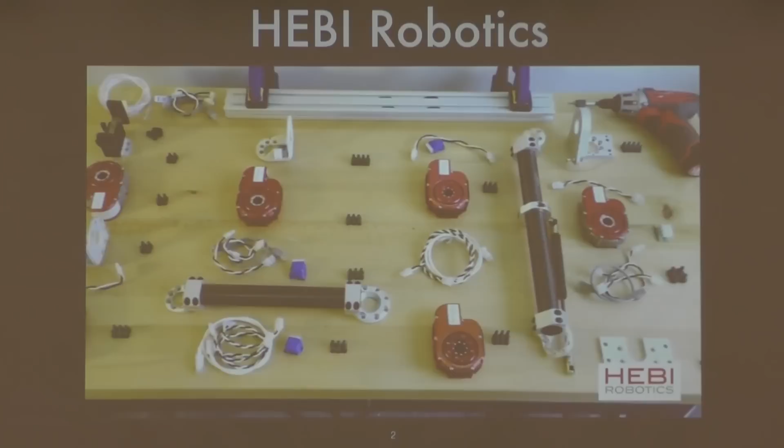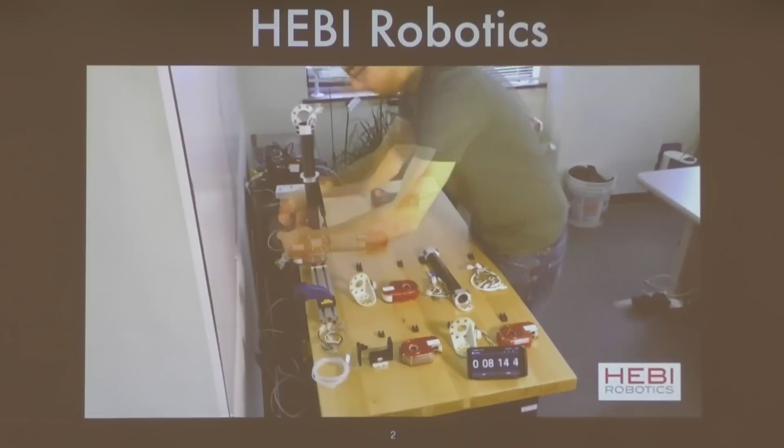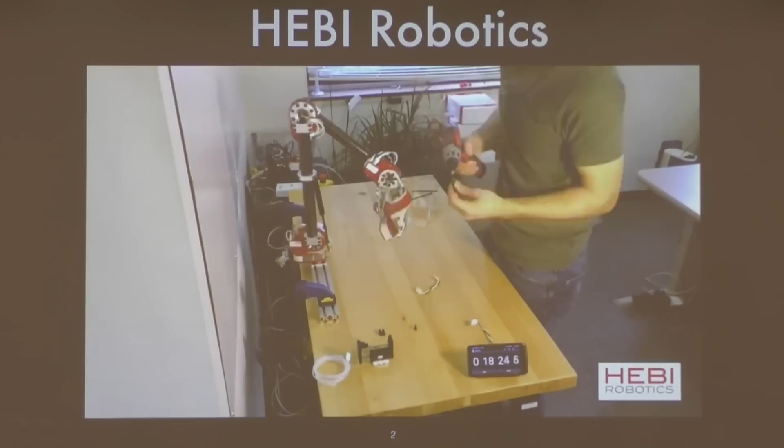So the goal of HEBI Robotics is to make building robots eventually as easy as building with Lego. We want anybody to be able to build a system, and we want to do it in a way that they're not even thinking that it's a robot. We want this to just be creating the next generation of tools that people think about the same way you think about hammers, screwdrivers, power tools today. It's just something else that amplifies and augments human creativity and work. That's what we want to be accomplishing. That is a long ways off, it'll keep us busy probably until the day we die, if not beyond.

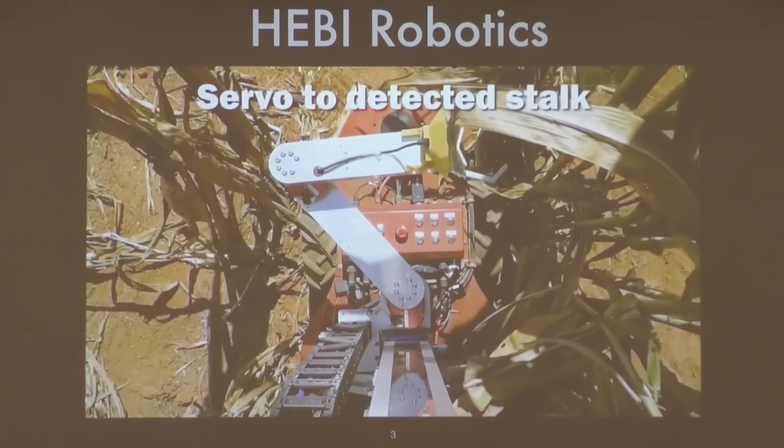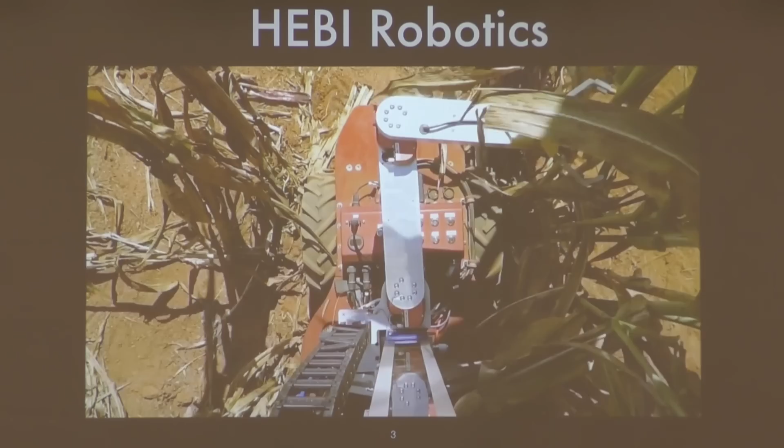But what we have right now are a set of building blocks we're creating that are used by researchers, and I think it's rapidly advancing people's ability to build robots and deploy them in the field. One of our first customers was the Robotics Institute, the FRC, and they had a project where they needed to sample sorghum stalks, this is a couple years old. What they did is they needed to sample things that were always vertical, so they just needed a couple degrees of freedom. They were able to use our modules, put them together, and get an arm that was lighter, simpler, and cheaper than taking an industrial robot and trying to do the same thing, or inventing something of their own from scratch.

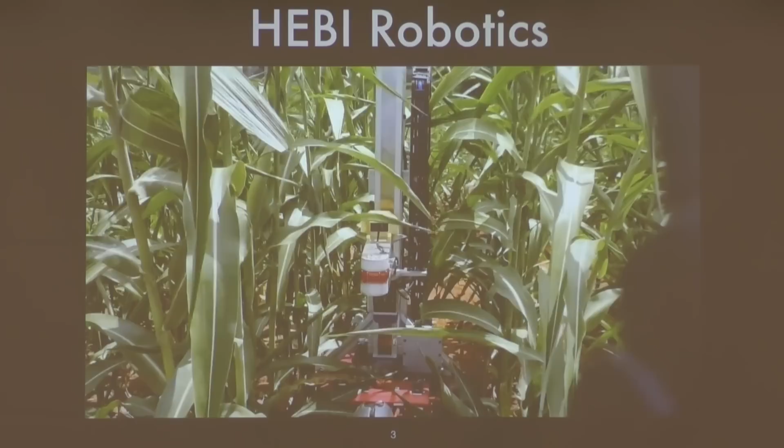In their case, the arm was the first thing up and running because it was really just building blocks put together. So they had at least that part of the demo going very early, which traditionally they would have thought would have been the hardest. One of my favorite examples right now is NASA Ames, which has built a tensegrity robot.

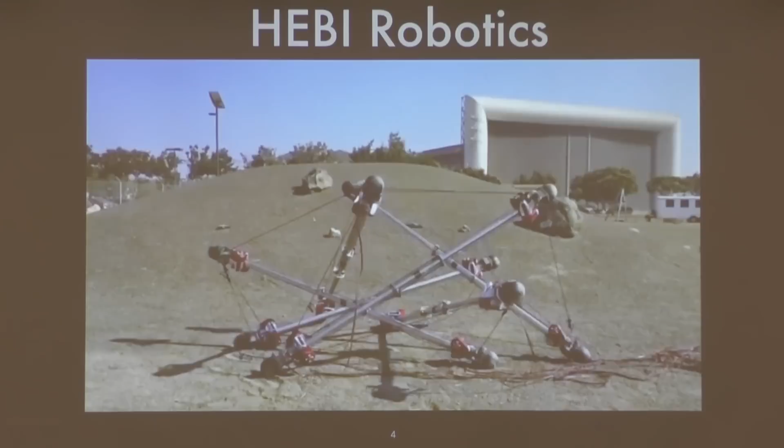If anybody's been behind the Carnegie, there's a sculpture that kind of raises up, but it's all built with cables going vertically. So picture that sculpture, I'm forgetting the artist's name, I'm sorry, but actuated, right? So the idea is this thing can pack into weird shapes, but be compliant.

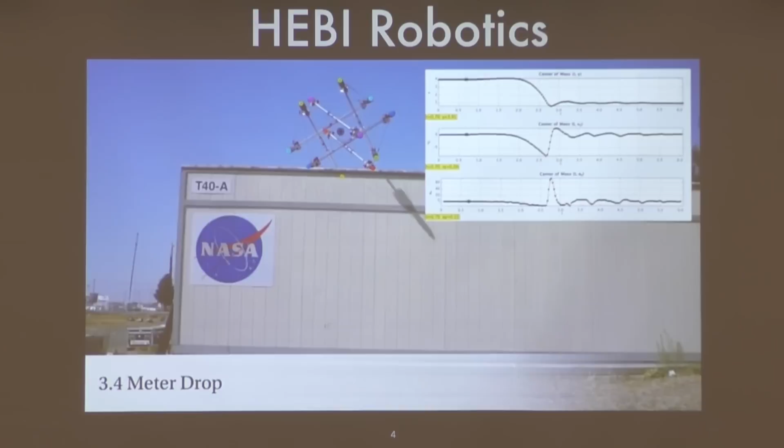And this is also an example of customers doing kind of whatever they want to our modules. They send us these videos, and we're like, oh, holy cow, here comes the repair bill. And they say, no, everything still works. And I'm going to talk about why that's important, and some of the technology we've chosen that enables that.

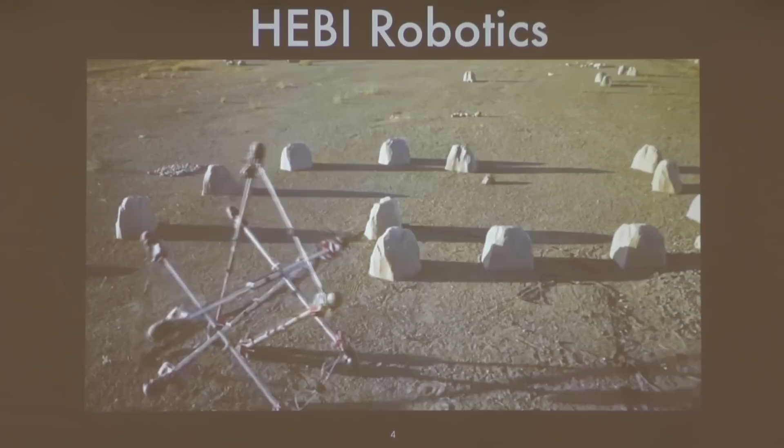I always thought that controlling snake robots might have been the hardest thing to figure out how to make move. But trying to make this thing move in a reasonable way, I think actually might be more difficult, which might be why they hired a snake robot guy to do the controls for it. I don't know.

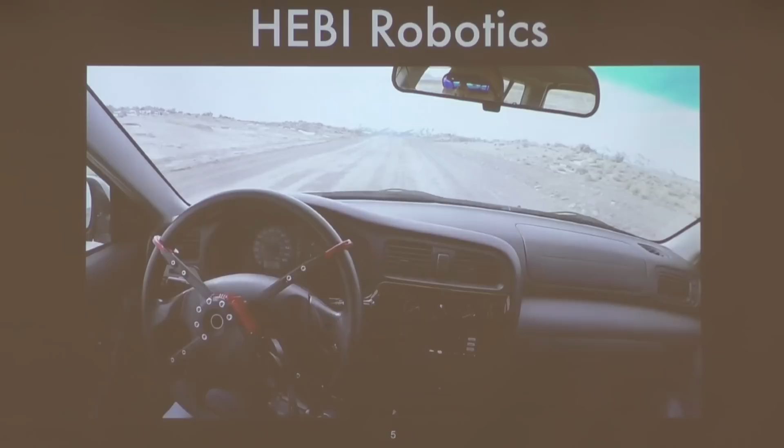And then lastly, some of our customers just buy single modules and make robots using a single degree of freedom. So this is a guy who basically makes bolt-on autonomy kits for cars. And he told us that's what he did. And we're like, oh, that's neat. So he'll probably be doing something in simulation or I don't know what.

And he sends us this video saying, hey, it works. And us engineers looked at that and said, oh, wow, that's pretty freaking awesome. And Bob, our COO, says, I'm going to spend some lawyer hours and revise our liability policy.

So it's really cool seeing kind of what people do, right? I'm really now kind of more and more inspired by the creativity of what people are able to do. So I'm going to dive into the technical side now of that actuator, that little red thing that you saw in all those applications.

So I'll start off by talking about what is an actuator. It is kind of maybe a vague term. The dictionary doesn't really help because it says it's a mechanical device for doing something. But I think that's actually pretty close.

And when I think about actuation, the problem I'm trying to solve, start to finish, is I want to go from a motion that I want, and that motion could be positions or velocities, or we think it's very important to also think of motions in terms of forces, and then actually do that, finish that. Take the thing that I want in my head that I can write out on paper and actually execute it, and hopefully even help me figure out what that is.

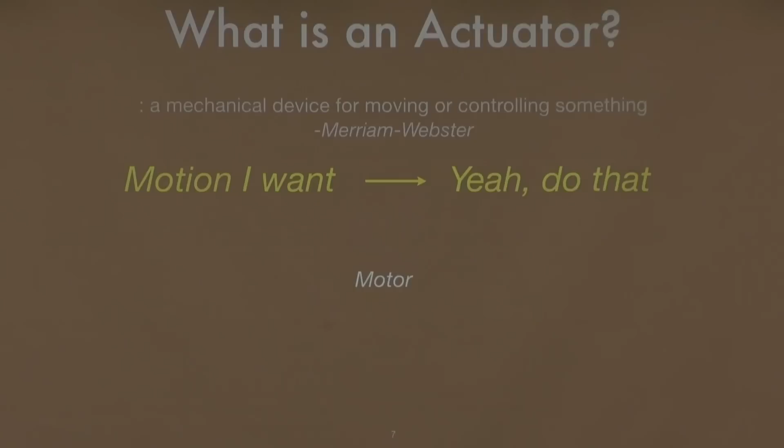So at its core part, you need, I'll say, a motor. I know there's different types of actuators, but for the purposes of everything I'm thinking about and talking about, we'll be talking about electric motors. But it very quickly spirals out to other things you might want, like a transmission - you're going to need a gear ratio because motors are high speed, low torque. You need high force, high torque, low speed, generally.

Now, if you want to actually do something, you might need sensors. Once you have sensors, you'll need to close the loop with motor controllers, communications. You want to be able to mount it. There's all these other things that you need to add. It's just an actuator - it's much more than just a motor and gears.

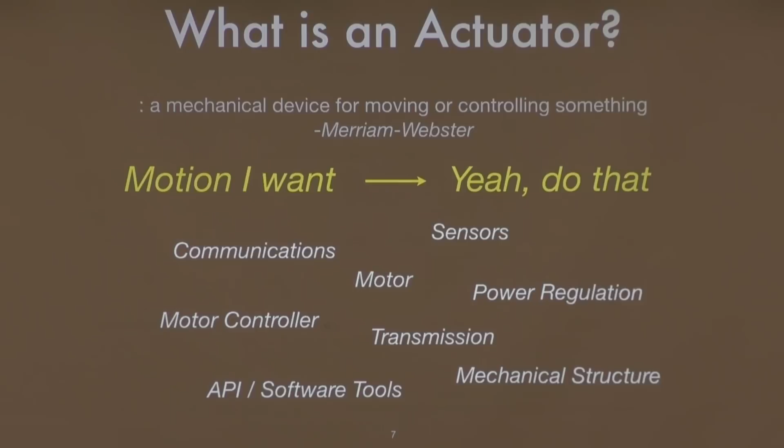And lastly, a big thing that we work on at HEBI is APIs and software tools to basically also help out with going from what you want theoretically to actually executing it and coordinating it. There's a big difference between going from one widget to now coordinating a bunch of widgets, whether it's an arm or a leg or even something weirder.

So actuation is probably - people think of it as maybe a very mature field, maybe not the most interesting thing. It's not as cool as maybe self-driving cars or other things. So why are we choosing to work on actuators? The quote that I like that sums this up is from Jerry Pratt in an article from the New York Times back in 2015 when Uber came and disrupted the RI. He said, if you're well-versed in the area of robotics right now and you're not working on self-driving cars, you're either an idiot or you have more of a passion for something else.

So Jerry Pratt is not an idiot, and he's extremely passionate about walking robots and humanoids, and he's one of the best in the world at it. I might be both, but I'm definitely passionate for actuation.

That is because I believe that actuators for robotics today, the kinds of things that people in this room are trying to do, I don't think actuation is really a solved problem. They're big and they're heavy for starters. We want to be able to move things out of an industrial world and have people around these objects, and they need to be maybe on the body, they might need to be mobile. So power and weight is a big part.

Generally, actuators that you can go out and buy today usually have poor force control. That's starting to change a little bit, but I believe that moving the peg in terms of what robotics is going to be able to do really involves controlling force in addition to positions, and perhaps making some other trade-offs on the way of doing that.

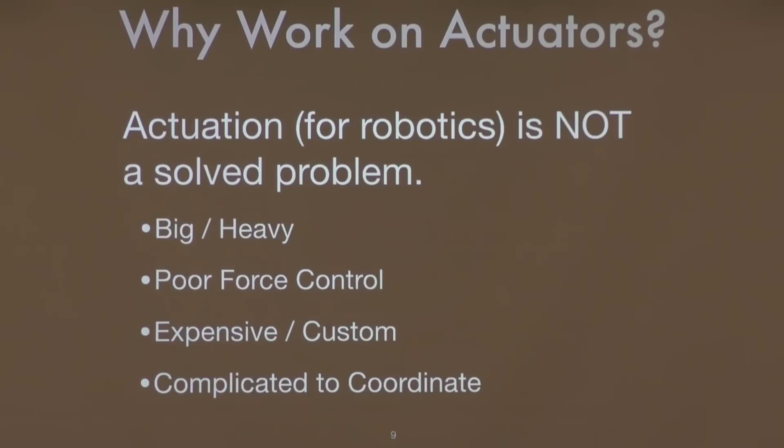If you try to solve these two problems above, you're going to wind up with something that's either expensive or custom. And then lastly, generally it's also complicated to coordinate. Even if you've made the system, trying to do the fancy things with it is difficult. So we're trying to incorporate other sensors like vision. We're trying to basically handle things that are much more complicated than the industrial blind, just do the same thing for 3 years sort of approach that robotics has done.

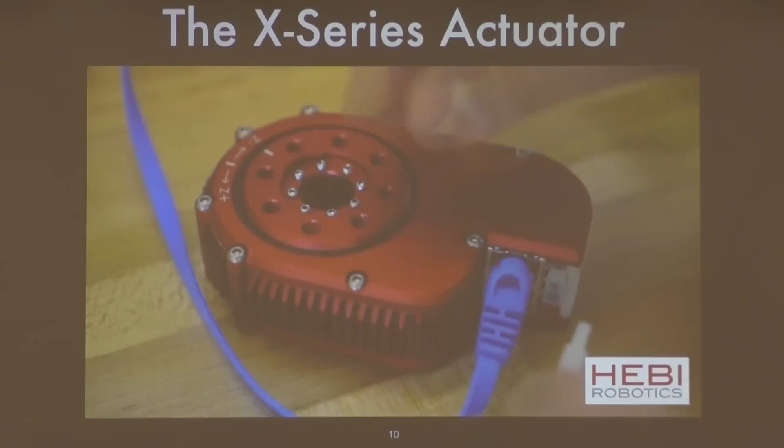So the first step toward trying to solve these problems is something we call the X-Series Actuator. It's everything I mentioned before wrapped up in a modular package so that you just give it power and Ethernet, and then everything else regarding motion control is solved.

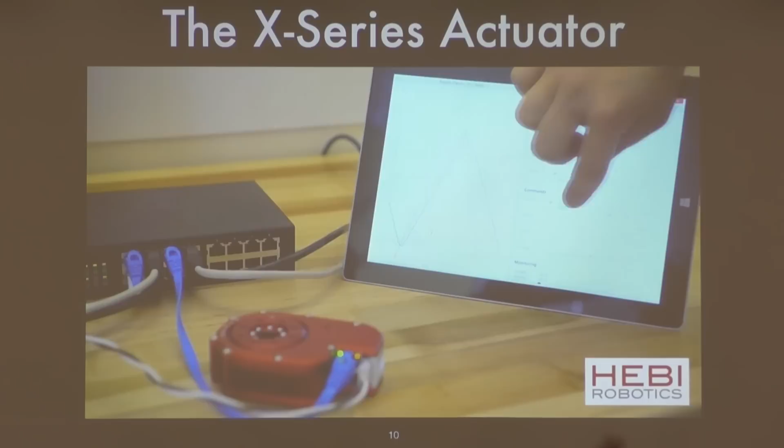Anything on a standard network can send commands to it - positions, velocities, or torques - either from graphical tools that help you debug and get up and running, as well as APIs so that you can actually write code to do it like you would with a normal robot. In addition to the sensors for motion sensing, we have things like IMUs embedded so that you can quickly incorporate that into your loops, make balancing robots, or understand the orientation of your arm on the fly.

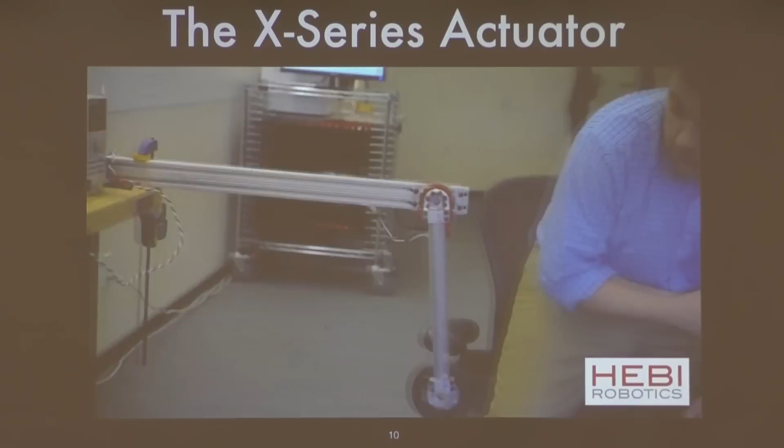Since we're on a network, we can basically use other sensors that might be on the network. So all of your cell phones have IMUs, gyroscopes, accelerometers that you can sense the motion of. In this case, we're just taking the velocity from the phone, feeding it to the actuator, and our APIs also provide all the tools for handling dynamics, trajectories, all the things to basically be able to smoothly control this weight from a simple signal on the phone.

Our customers can use as much of that or as little as they want. Some people are experts in dynamics more than we are, and they'll throw those layers out and do their own thing. Lastly, every actuator we make is a series elastic actuator, which means they're compliant. That means it's easier to control force, easier to sense force, and a little bit safer to be around in the sense that impacts aren't as hard.

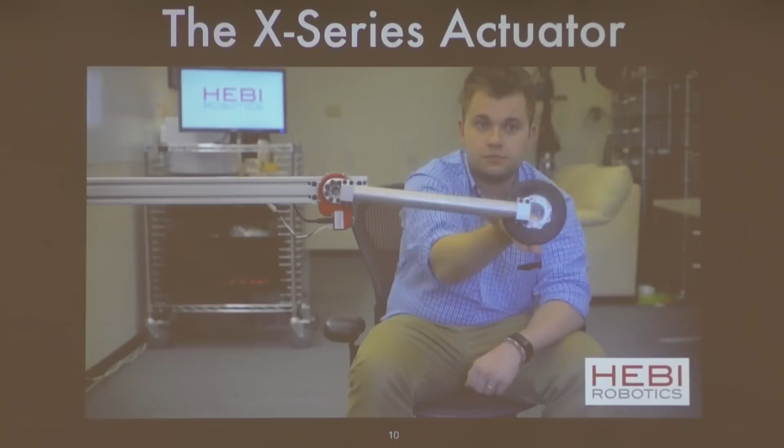It's kind of like a shock absorber. So in this case, we're swinging a weight around, but we're still sensitive enough in our control that we can interrupt that, react to it. And then the final part of the video, the big reveal, is everything spins around and ta-da! The whole thing was filmed on a 6 degree of freedom arm built out of our own actuators with the idea that we want to be able to do fun stuff like this.

I can't really take credit for the video if Nico's here. I don't know if Nico's still hanging around. Nico Zevallos did this video, this whole thing was his idea. And we still have that mirror, Nico - you can pick it up anytime you want.

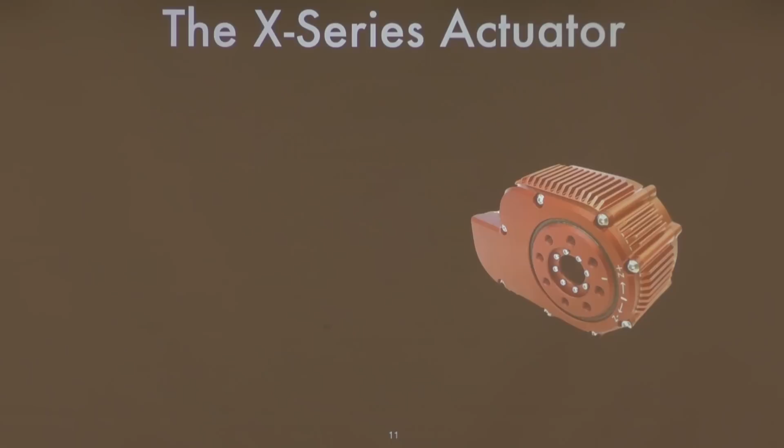So the highlights again: it's a series elastic actuator, I'll explain what that is a little bit. It's modular. We focus on it being really power and torque dense, really more torque dense. We focus on having very, very large gear ratios and going slow if that's what's necessary. And we believe in simultaneously controlling position, velocity, and torque.

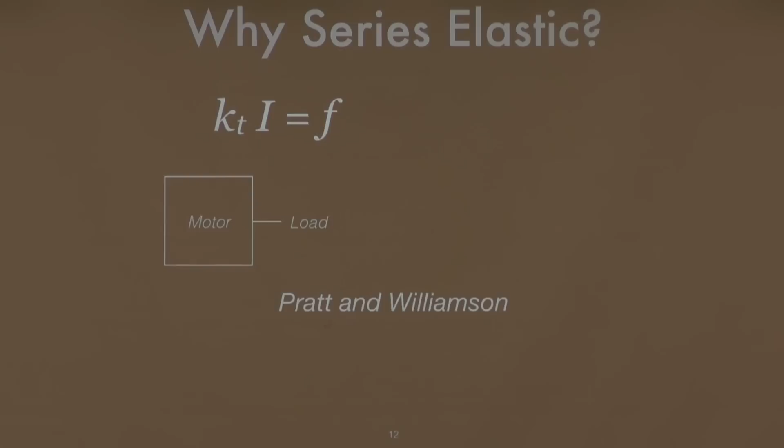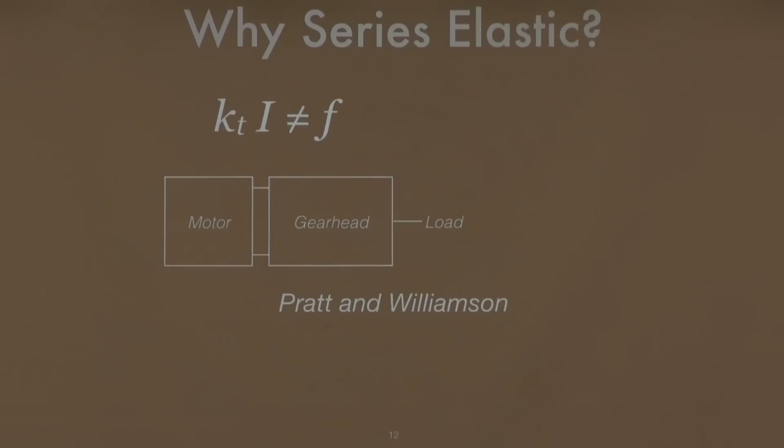So why would we choose series elastic actuation? If you want to control force, one way to do it is with an electric motor. One of the really awesome things about an electric motor is that you have your torque constant, and you know your motor current, and you multiply those two together to get your force. But if you put a gearhead on it, like most robots have to do, you might as well just put a not-equal sign there in some cases. If you think of certain gearheads, like worm drives, things that aren't back-drivable, you could put a gearhead on a motor that supports basically infinite load with no work from the motor. So you could try to use that to sense your force at your own peril, and in general it would not work.

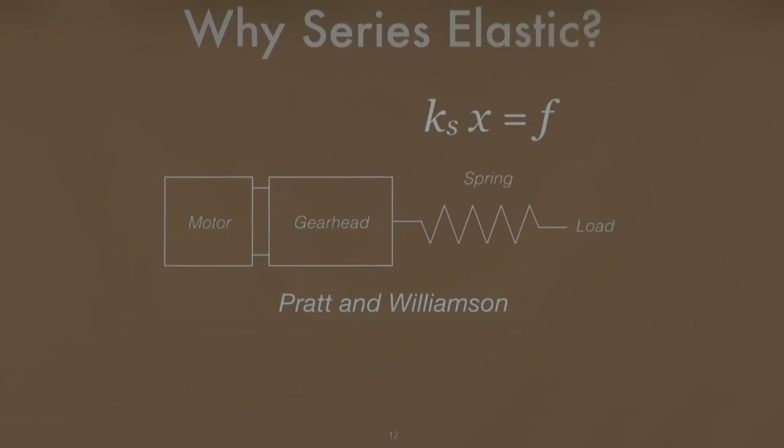So some guys at MIT in the 90s, Gil Pratt and Matt Williamson, came up with the idea of a series elastic actuator, which is basically a fancy word for saying I'm going to put a spring on the end of my actuator, and use that to make controlling force easier. I'm going to low-pass my actuator, and solve things in an engineering way, in the sense that sensing force is actually pretty hard, but sensing position is really easy. So I can sense the displacement of a spring, and if I know the spring constant, figure out my force. I've turned that force control problem into a position control problem.

So when we focus on creating a new series elastic actuator, what are the parts we want to focus on? We've got motors, gears, and springs. All three of these are actually really mature technologies. Motors have been around for 100 years, and there are some really great ones for robotics, no matter what scale you're working at. Gears are also a very mature technology, from harmonic drives on the high end to well-understood, well-engineered commodity spur gears that you can even customize. Where we found we wanted to focus our efforts, as strange as it was, was really on that spring, which I'll get to in a minute.

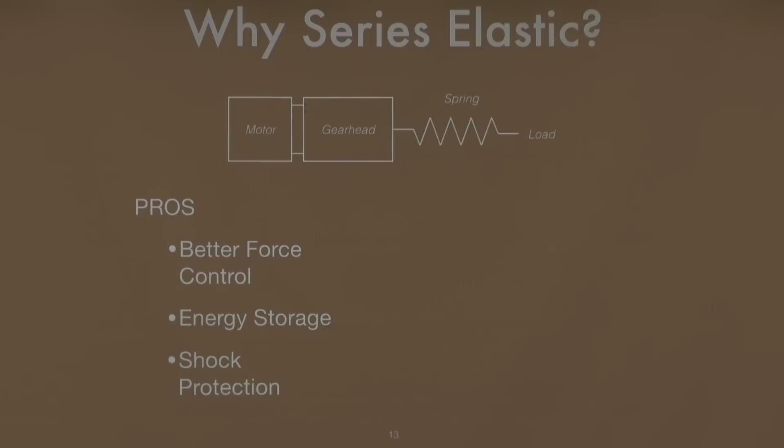Series elastic actuators have advantages, and whenever people talk about them, they usually list three things in order: better force control, energy storage—so if you're making a walking, running, or hopping robot, a spring lets you get by with a much smaller motor, like a pogo stick—and shock protection, like the suspension of your car. This is the part I stress the most: if you're making a modular unit and giving it to people who can do whatever they want with it, that shock protection from series elasticity is one of the reasons we're not eating it in support costs with all the crazy things people do.

But there's no such thing as a free lunch, so it comes with drawbacks. When you make your system compliant, you're deliberately trading off worse position control. The more compliant you are, the easier it is to control force, but the harder it is to control position. And you're adding complexity.

You're adding springs that weren't there before. You're adding sensors that weren't there before. Your control loops on how to handle this become more complex. So the electronics, the software on the module itself becomes much more complicated. And even at a high level, coordinating things is more difficult.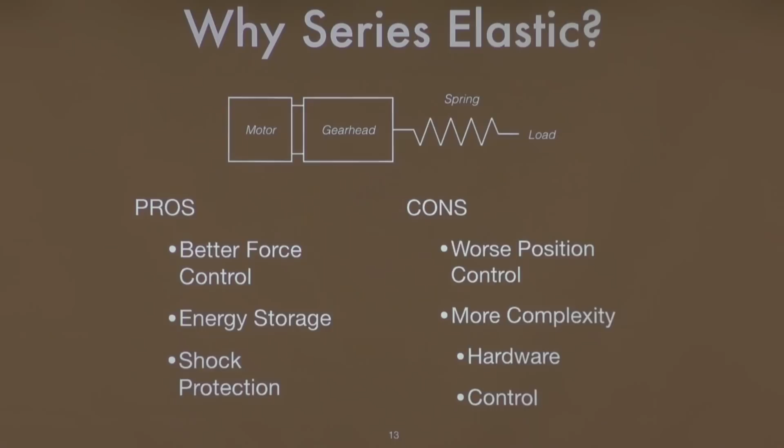When you have a big stiff robot, you can really sweep a lot of things under the rug by commanding positions, cranking up the gains, calling it a day, and telling people to get out of the way. But with a compliant robot, you have to think about dynamics, you have to think about gravity, you definitely have to think about smooth trajectories. And so you have to give people the tools to do this stuff, because while it's not necessarily an unsolved research problem, it is error prone, it's tedious, and it can definitely slow down research if you're trying to do all that from scratch.

So as I talked before, the thing we decided to really focus on, that seems weird that we thought was lacking, was really the spring. So the core part we embarked on, while we were still at CMU in Howie's lab, was designing a spring as small and compact as we could for a series elastic actuator. The main person leading this design, certainly in his experience, was Ben Brown. And he should know a few things, because he's made some of the world's best pogo sticks. So when he tells me how to design a spring, I'll definitely listen.

And he said, well, the space constraints are really tight, so let's look at the energy densities of material. If you're designing a spring, what matters is how much energy you can store either in a small space or for a very light weight, because we care about being light, we care about being small. And both by volume and by mass, the energy density of rubber is just through the roof, like 3 to 4 times higher than any other material.

And in practice, it winds up getting exaggerated even more, because if you're using steel and fiberglass, when you're designing something, you have to leave all this negative space in your design for the thing to deflect into. Whereas with rubber, you're just stretching it, and in our case, we're just shearing it. So as a material, it gives you a really good design space to work in, and a really efficient use of what little space we had in the snake modules as we started designing this.

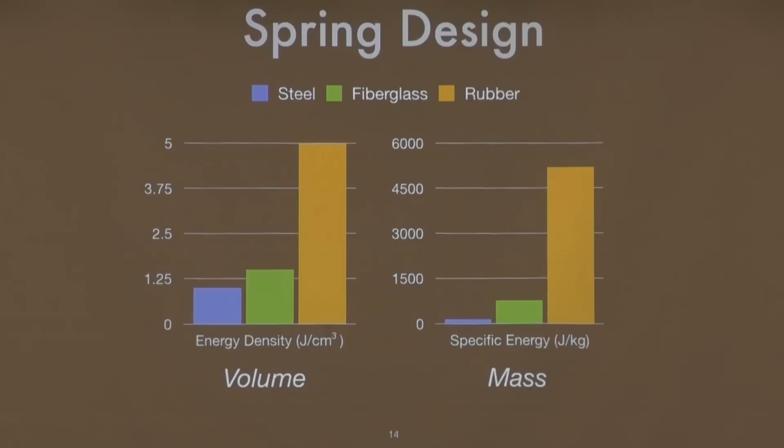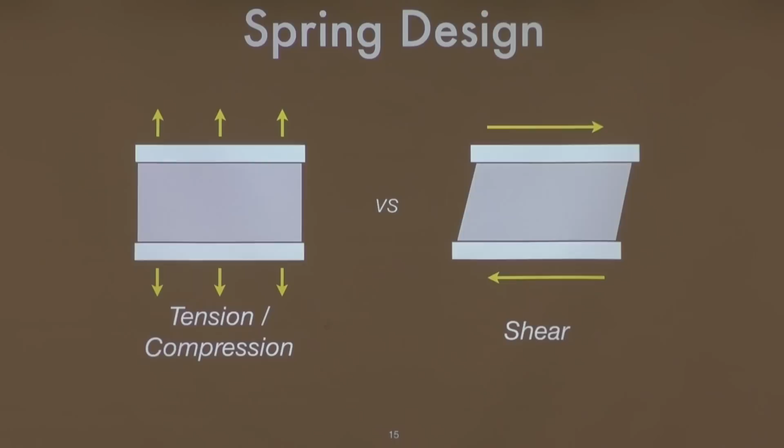When most people try to use rubber, they use it in tension and compression. That tends to be nonlinear, which out of the gate we'd prefer to avoid, so we don't create a huge modeling problem for ourselves to start off with. So we found out that if you shear rubber, it's roughly 3 times less stiff, which gives us more compliance. We can explore lower ranges of that spring constant, which for snakes we were really interested in doing. And it winds up being a lot more linear.

And so what we wound up designing at the end of that effort was a steel plate glued on either side of pieces of rubber. But the design of the plate is important, the bonding of the rubber is important, working with people who know all this materials science, working with rubber, is important. Fortunately, Ohio next door is still the rubber capital of the world, and we've worked with some great suppliers over there who know what they're doing.

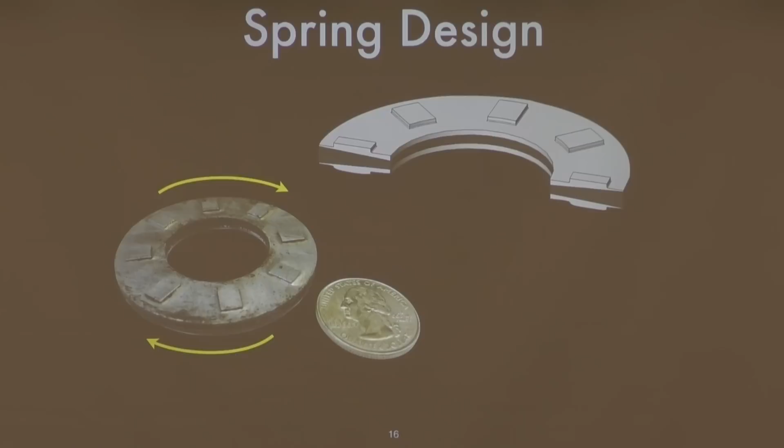And then we did a trick where we tapered this cross-section to use the rubber even more efficiently and improve the strength. So if you have a conical profile, this thing's shearing, right? Like take a donut, top and bottom, and twist it like that. If you have a conical profile, the rubber is at a constant shear angle anywhere in it, and that holds for any dimension as long as that cone intersects at the middle. And so that's a design we came up with at CMU, which CMU patented, and HEBI has the license for, and we're off to the races.

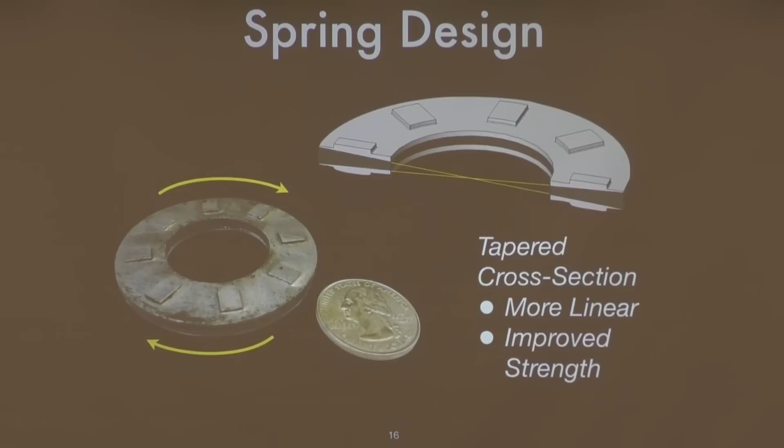And some of the early papers on it demonstrate the linearity. When people are looking at springs, you're looking at the displacement-torque or displacement-force curve. So a straight line would be a linear spring.

What's the longevity of the rubber? How long does it last? It depends what you're doing to it.

What we found out from the snakes, kind of after the fact, is if you start getting up into this range, you might be in the thousands to tens or hundreds of thousands of cycles. What's interesting about rubber is there's a heat dissipation thing where the rate matters a lot. You could go to a huge load, come back, over and over, but if you do it over a longer period, it will last pretty much indefinitely. If you double the rate, the thing might fail in a day. So the failure mode is interesting.

One of the things we've done at HEBI is have a much bigger factor of safety. The snake springs were really under-designed and would shear to almost a 45 degree angle. The springs we use now stay in a safer regime. One of the reasons for working with a rubber supplier, we asked if natural rubber was okay. He said these are what's in the bushings underneath a Ford F-150, and they last for like 5 years, so you'll be fine. We definitely did some poking around, and there are some non-intuitive failure modes we've discovered.

What's 40A? That's the durometer. When you're specifying rubbers, that's a great design parameter, because once you have the shape molded, you can specify anywhere from about 30 to 70 durometer. 30 is really soft, maybe like skin. A pencil eraser is 60 or 70, something like that. 70's pretty hard. It's not a linear scale, it's not like 50A rubber is 3 times as stiff as 40A rubber. The scale's kind of weird. But just by selecting a different rubber from the mold, we can have the same spring cover a wide range, in addition to adjusting the geometry. We've looked at natural rubber and neoprene.

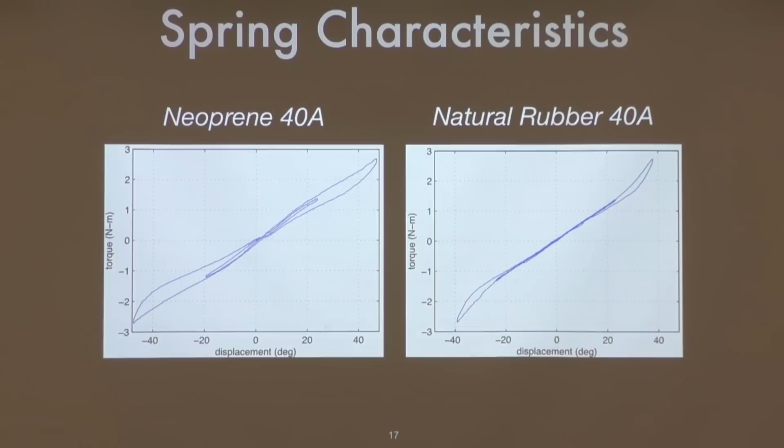One other thing I'll say is I think damping is a good thing for a lot of robots. Whenever you read papers about series elastic robots, there's usually a line that's like, man, we had to incorporate a lot more damping than we thought, and we're doing it all with the motor. In our case, I think losing a little energy in the spring helps controllability. If you think about off-road vehicles, you have dampers, and they dissipate energy left and right, all in the name of controllability. It's when you really care about efficiency that you might want to take that out of the system. Right now we're mainly using it for shock protection and force control, energy storage to some degree, but that's lower on the priority list in terms of what we're looking to get out of series elasticity.

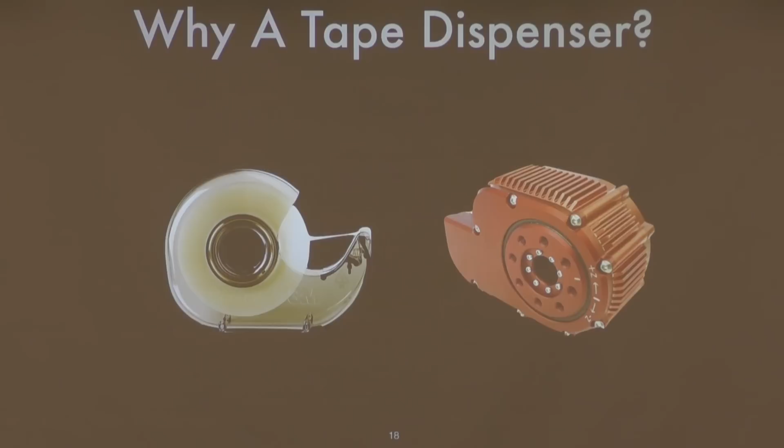So from a more industrial design standpoint, people ask why it looks like a tape dispenser. We tried a couple different things, and we wound up with this weird shape really because it was function over form. Whenever you're doing design, you start with constraints.

We knew we wanted to use spur gears, so we weren't using a very exotic transmission. We knew the motor we wanted to use, so we basically designed around the spur gears we had to have and the motor we were going to use. We wanted to use standard connectors, so we built around a standard RJ45 connector.

After doing that, I know why they're disappearing from laptops - the connector is enormous. Once you design for this connector, we knew we wanted a through bore for wiring to keep the system clean, have high dexterity at the wrist, and be able to spin around. So the bore has to fit that RJ45 connector, and it has to be 15 millimeters.

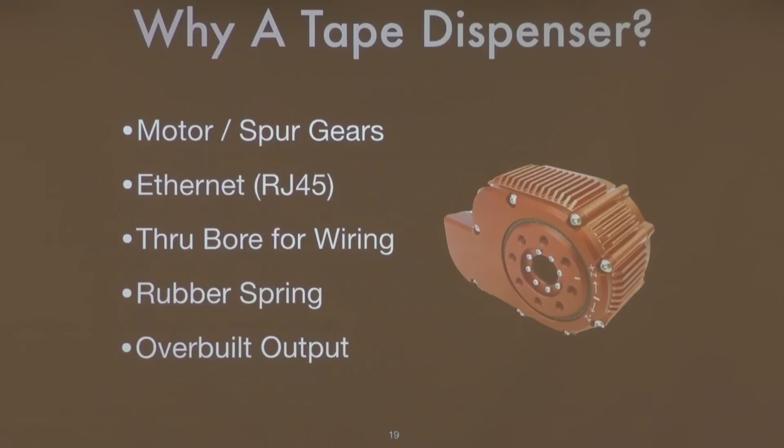We have to have a rubber spring, and we want a giant bearing on the output so people don't have to do a lot of extra engineering to put it together, even if they're chaining together long things from a base module. We want it to be like Lego, where if it looks like things go together, they should just go together.

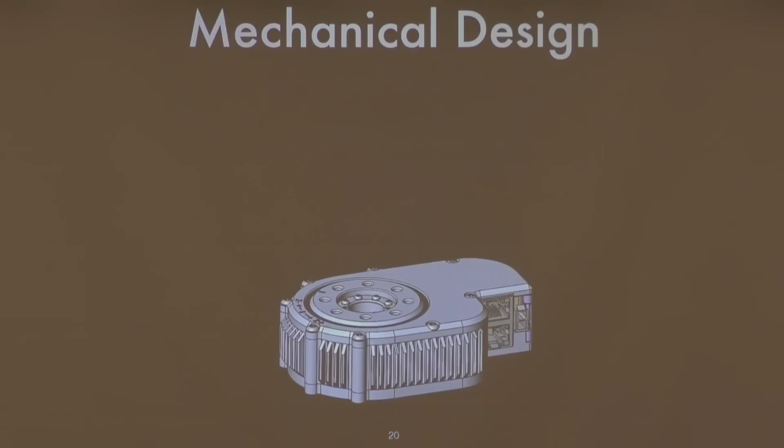And exploding away on the inside - I used to tell people not to take pictures of this, but now if you Google HEBI Robotics and click image, the third link or something is a teardown of our actuator, so who cares? The inside looks like this.

Basically the lid comes off and that bears all the support. The last gear in our gear train is actually really large. We wanted to have, even though we have multiple gear ratios, we need to design for the largest, the heaviest torque, the highest force, and you have a very large gear with relatively large teeth.

But then the other thing that goes well with this design, which is why the spring design we've designed really is good for spur gears, is that the last stage has to be very large, and this was true even back in the snake robots. So you have all this negative space that you're going to make empty anyway just to save weight, but that's exactly the space where the spring sits.

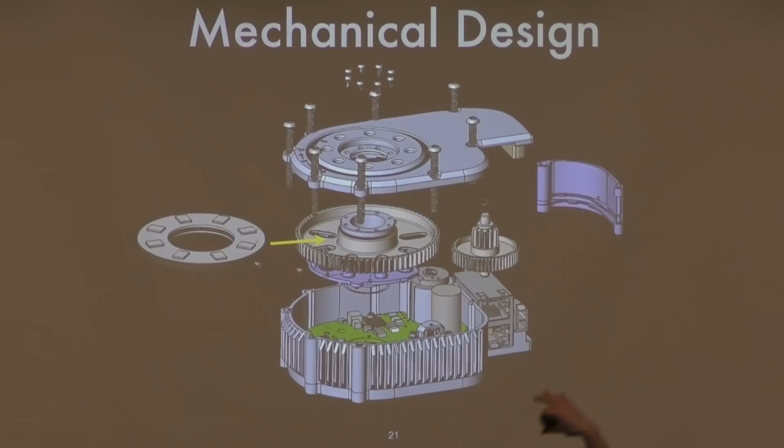So the last gear is actually on bearings in here, so this gear rotates around the hub, and the spring is that coupling between the timing notches in the gear and the timing notches on the bottom of the hub. Then we sense both sides of that for our deflection. So it fits in pretty elegantly, at least from the spring design.

The other reason we chose spur gears was so we could have multiple gear ratios in the same package. If you have two shafts the same distance apart, you can pick the right number of teeth so you're engaging your motion closer to one shaft or closer to the other. Using that, we can get basically a 6-to-1 dynamic range from our high speed to our high torque, which is pretty wide for something of the same size.

That means our high torque end is almost 6.5 times more torquey than our high speed end. So for the same amount of power, we can cover a wide range, which is important for making arms, because the shoulder requires a lot more force than something like the wrist, and you don't want your wrist to be slow.

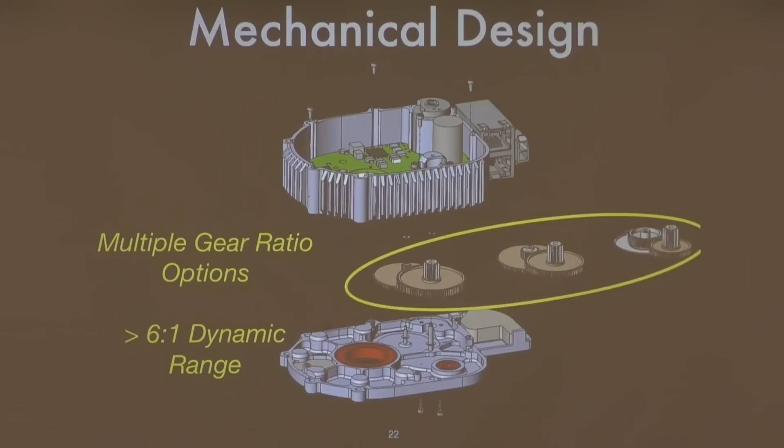If you look at things like harmonic drives or a lot of other gear reductions, you're in this 50 to 150 to 1 ratio, so you have a 3-to-1 range. The fact that you're in the 50 to 150 to 1 means a lot of choices have already been made for you in terms of the motors you can use. Whereas we have a wide dynamic range, and we have whatever choice we want in terms of gear ratios. So we took some pretty extreme choices on what kind of motor we were going to pick.

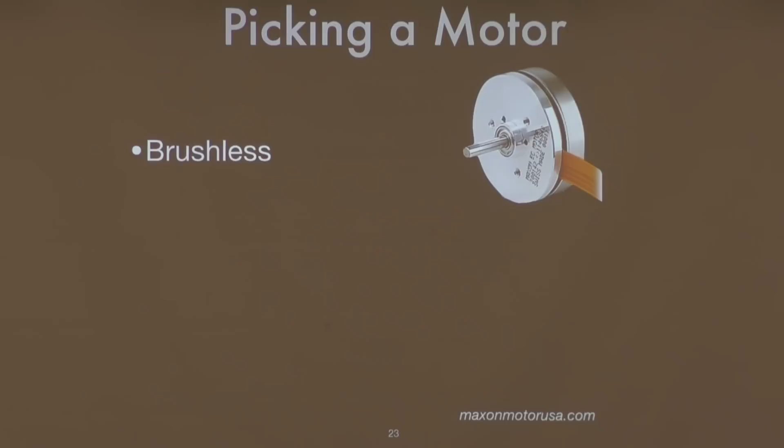Other people we were influenced by: talking to Aaron Johnson, working on RHex, talking to Sangbae Kim at MIT. They're like, electric motors can kind of do whatever you want as long as you don't melt the windings—very, very carefully—and as long as it's a brushless motor. So we're picking brushless motors and overdriving them like crazy.

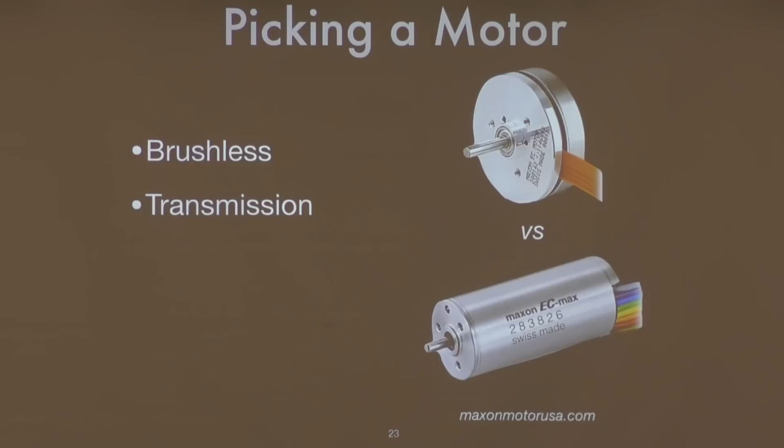You want to think of it in terms of a transmission. In our case, we chose in-runner brushless motors for a couple reasons, but mainly that we could put a very large gear ratio on them, and they have the best thermal properties. You want to heat sink your motor really well. In this case, even though these motors spin at really high speed and need big gear ratios, the windings sit on the outside, so getting that heat away from the motor—which is the thing that limits your performance.

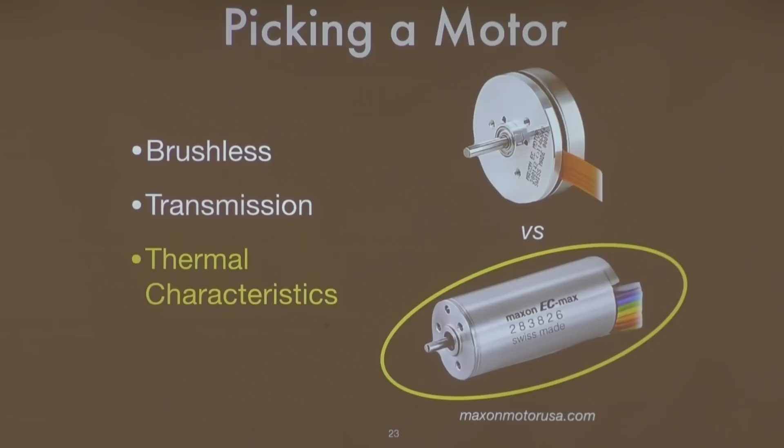If I'm looking through the Maxon catalog, the thing I look at now is in the bottom left corner where it says thermal resistance. That, plus its capacitance, tells you how hard you can abuse it, assuming you can give it as much voltage as you want. A weird thing about motors is I think of it like you pay for torque, but speed is kind of free as long as you can give it enough voltage. So we take 9-volt motors and drive them at up to 48 volts, but do it very, very carefully.

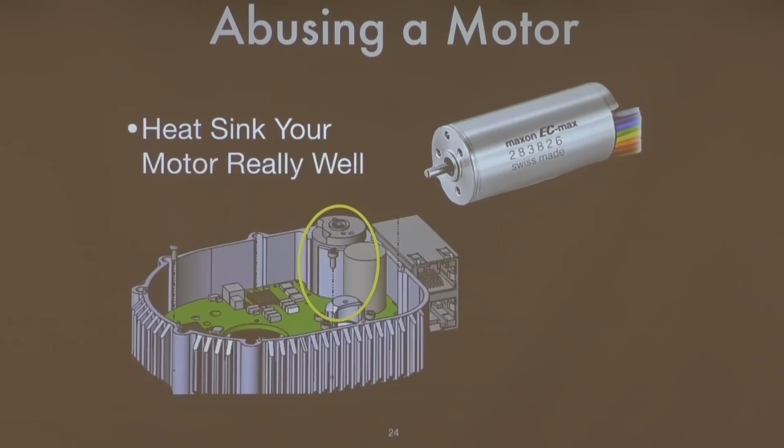That's all predicated on heat sinking your motor really well. One of the reasons the actuator is designed the way it is, is all in the name of getting heat away from this motor. At the scale we're at, we don't really need active cooling—just wrapping it in aluminum and using conduction does most of what we need. At a larger scale we might want something fancier, but really most of your gains are made just by blowing the slightest breeze you can, or wrapping your motor in metal. You don't have to go to liquid cooling unless you're really going for Iron Man type performance, which we're not.

And then really you want to model your winding temperature really, really well. In a perfect world I'd want a sensor in my coils telling me exactly how hot they are. But in reality, if you're already doing a lot of stuff on the module, you can basically give yourself a sensor—you create a model onboard using data that Maxon gives you that's pretty accurate. So when we look at feedback from an actuator, you get this sensor, like this green line that doesn't move. This is from the snake robot, where I was loading it really hard with my hand, and this is the winding temperature going up based on a model that we've verified is really accurate.

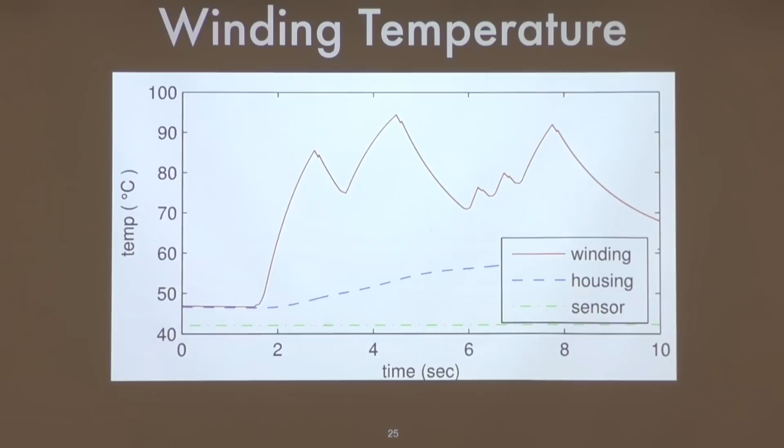It's probably within about 5-10%. In that space of time, the temperature sensor, which is literally touching the case of the motor, does not move, right? But there's a 2-stage thermal model that we can report back. You might as well think you have a sensor on it, because we know the current, we know the winding resistance, we know the voltage, we know how fast the motor's spinning. We can use all that to tell you quite confidently how the winding is doing.

I'm going to skip through the next little bit and get to more of the business side, if that's all right, unless people have questions on motion control, position, velocities, torques. No? Oh yeah, actually, I think...

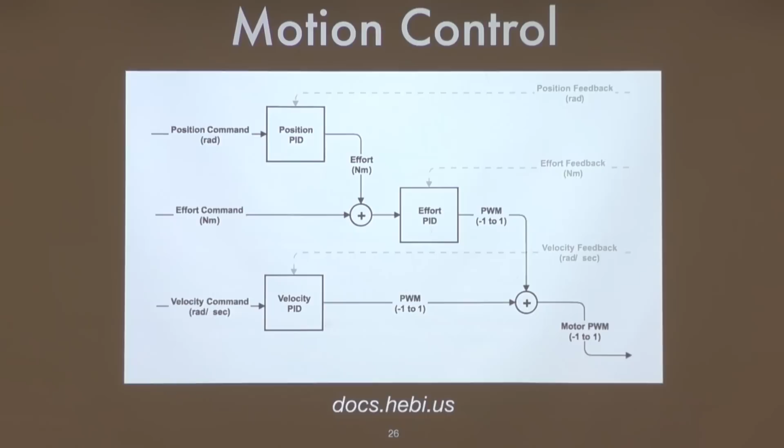Adding the springs essentially creates a first order filter, so that you cannot achieve very fast control performance. That's right—you cannot get as good bandwidth for control bandwidth on your position, because you're compliant. So you're not going to have the superhuman repeatability. Even if we solved all the engineering problems, with perfect sensing, perfect motor control, no backlash in our gears—if we took an industrial robot with all of that high-end engineering in it and put a spring on it, we would not have the repeatability at the cycle times you get with an industrial robot. That is explicitly a trade-off we're making with this technology.

But do you have any plans in the future, for example, to use steel or other materials and have a larger stiffness spring, so that you can improve your performance?

One of the things we say, and maybe it's a bit of a punt, is we can always put a solid steel slug where that spring is now—we can make a stiff actuator anytime we want. Right now I don't think that satisfies the need for what we're seeing with the market yet, but we could. Yeah, that's explicitly the trade-off we're making.

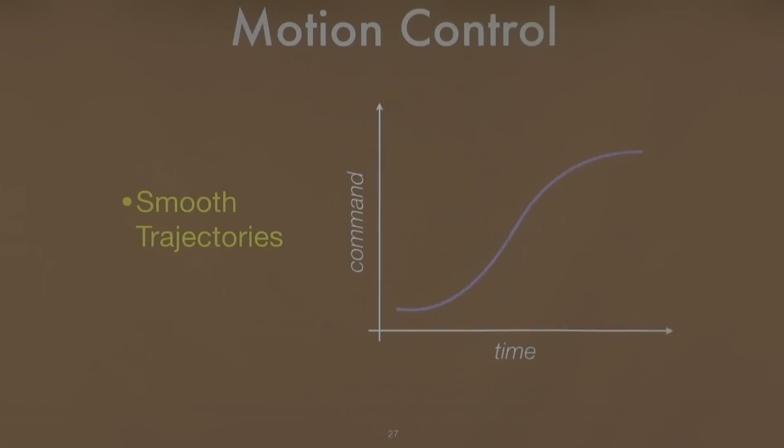When you started off, why aim for a force control actuator? Were there other force control actuators at the time?

That's a great question, but let's skip over this and get to the next part of the slide. I'll get to your question in a minute about why we were doing a force-controlled actuator. It'll be a bit of a tongue-in-cheek answer, so if that's not satisfying, you can push me on it again when we get there.

So why start a company? Howie has the best explanation as to why start a company, and particularly why start HEBI — and that was to keep the band together.

Matt Tesch was doing software engineering at the same time as his PhD. I came in doing mechanical engineering based on my past experience while doing my research. Florian did amazing software development that became the foundation of all our APIs for control. And Curtis, our electrical engineer, packed more and more things into the Snake module. We had all the bases covered for technical development.

We worked really well together — we had that Vulcan mind meld like a good band has when they're working together. And we've continued to grow that team and keep that spirit.

The big part of it — why do this as a company, why not just do it at CMU? The tongue-in-cheek answer is: our funding was up, but we weren't done.

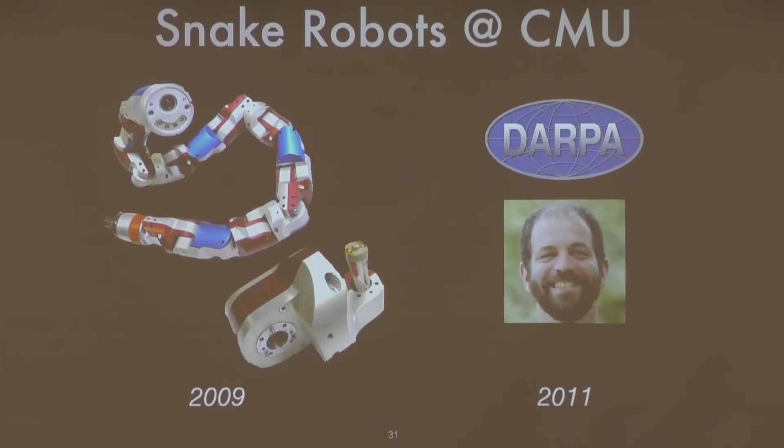About two years later, a guy named Gill Pratt, who invented series elasticity, started a DARPA program that became the DARPA Robotics Challenge. He had a whole part of it focused on actuation, and he basically said — paraphrasing, Howie can correct me if wrong — if you guys make a series elastic Snake robot that could control forces, I could fund it. And we said okay.

I hadn't really heard of series elasticity at that time, so I looked into it and talked to Ben Brown, who had been involved with it since the early days. We decided that for a Snake robot, force control makes a ton of sense — the way snakes move through the world isn't through position control. We've worked a bit with Dan Goldman at Georgia Tech, and when you put different pegs in the world, they adapt, they comply.

Whatever they're doing to get around those pegs, it does not exist in deliberately specifying joints. They might be, maybe they are very simple wiggles like we're doing, but maybe those wiggles exist in force space instead of position space. Questions like that. And we want to test this in the real world.

So we said, yeah, actually, let's make a really compliant robot that can control forces. And so by 2014, we got this robot. In addition to being series elastic in a very small package, it was a really well-timed point in the world where a lot of other things were becoming miniaturized, and we could go from serial to full 100 megabit Ethernet on the module.

We could run a real-time operating system on the module, sensing for our encoders, sensing for IMUs. A whole bunch of other things had gotten small enough that we could now throw this in the module. So there's a lot of practical technical advancements in the world that advanced at that time. And brushless motor controllers—we were able to go to a brushless motor at this point because you can now buy chips the size of your pinky that control brushless motors. And we've been growing ever since.

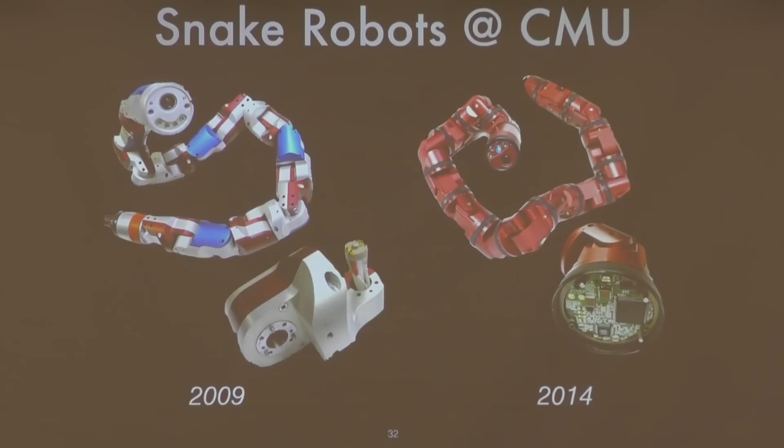But it always leaked from the same cracks that you can see in the ceiling. So we set up gutters and then we piped it all down to the edge.

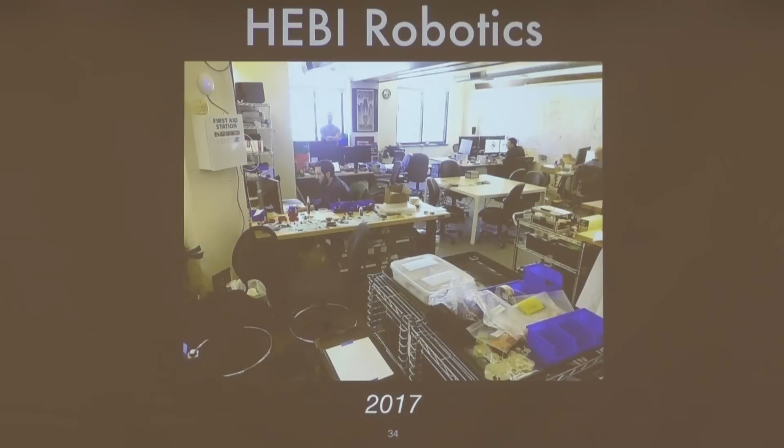Howie was in for one meeting, and this was early on when it was really bad, and you couldn't really notice that it was leaking because the gutters were doing their job. And one of the building guys comes in and says, 'Is the ceiling leaking?' And we're like, 'Just in the usual places.' He goes, 'Okay,' and he leaves. And Howie's just like, 'What?'

And then we did stop complaining to the building guys because the first time we complained, they gave us a bucket. So then the second time, we said, dude, the ceiling's still leaking. They came in and said, 'There's our bucket,' and they took it and they walked out.

So we're not there anymore. We're in this building in Lawrenceville called the Chocolate Factory. And we have more space, but we're starting to fill that up too. It's a little bit more of a subtle transition, but that is yesterday. So we're kind of starting to burst the seams at this space. We're not growing like Silicon Valley 2x every year style, but we are growing, and it's kind of neat, at least for me to look back and see that perspective.

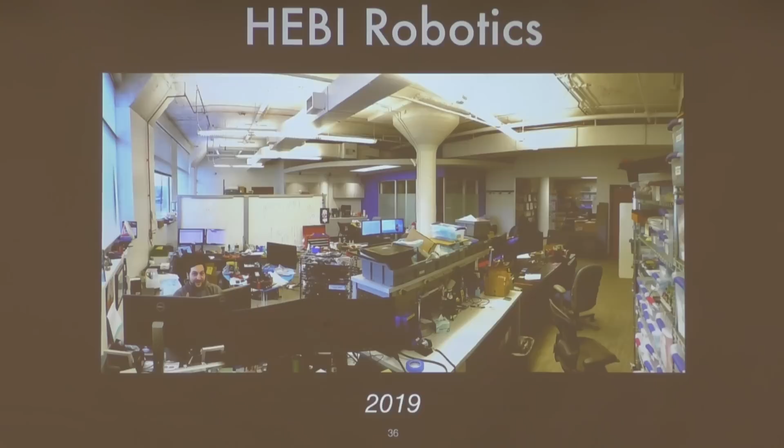So I'll close out the talk with what are the things that I worry about. When I first started with HEBI and was moving from finishing my PhD into HEBI, the things that kept me up at night were all technical questions, like, we want to take the spring and have other people use it—how long will that spring last? Have we been doing the right tests? What should the overall form factor be if it's not a snake robot? How do I get gears that have the right strength, the right lifetime? How do I find the right suppliers to make all of this at the quality I want? These were all technical things that I was focused on. That's what kept me up at night.

Nowadays, what keeps me up at night is revenue, which I guess is kind of a duh, but we're choosing to try to make a company that's self-funding as much as possible. We are selling—when people ask us, well, how do you make money? And we say, well, we make a widget and then we sell it for slightly more than it costs to make it. And people are like, whoa, right? But that comes with its own risks. There are good months and there are bad months. So it's not like a subscription thing where we have this baseline. It's a good source of revenue that we have, but it's really bursty and really, really stressful. And so I'm trying to think about ways of how to make that more reliable.

Focus. One of the things I've heard thrown out about startup companies that I totally believe is your biggest cost at a startup is opportunity cost. The most expensive thing you can do is focus like mad on something that's not worth it, especially if you have an amazing team like what we have at HEBI. So I'm paranoid that every day we're working on the thing that we should be working on, if that makes sense.